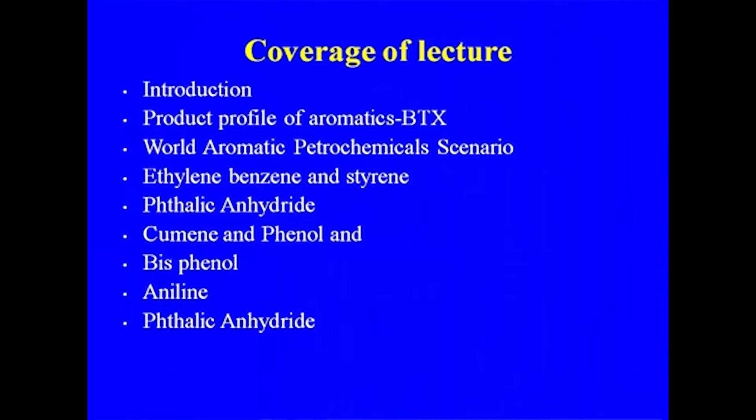As we discussed, ethylene is the king of chemicals, so aromatics is the backbone of the organic chemical industry. This was true even before the coming of the cracker.

There was aromatics production in some form, and one route was through coal, coke oven gas. We already discussed coal chemicals and the different types of aromatics obtained from them. Now we are talking about orthoxylene for phthalic anhydride, but earlier it was the naphthalene route produced from the coke oven plant.

This shows the historical importance of aromatics, but their real growth came only after the advent of catalytic reforming, because the requirement for aromatics is huge.

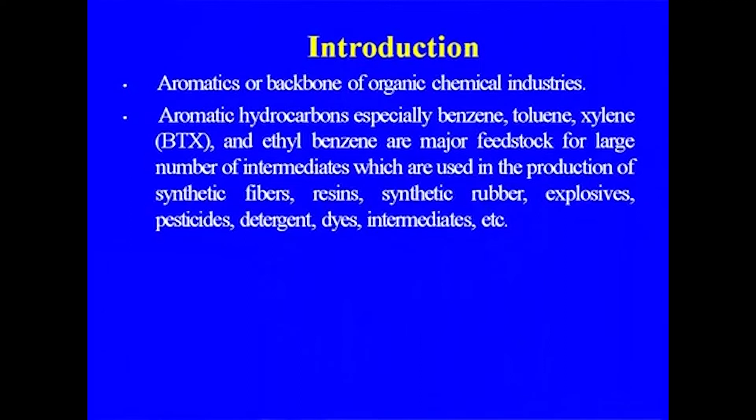If you see the product profile of aromatic hydrocarbons, especially benzene, toluene, xylene (BTX) and ethyl benzene, these are major feedstocks for a large number of intermediates used in the production of synthetic fiber. Take the case of benzene: we produce cyclohexane, and cyclohexane to caprolactam.

Similarly, xylene goes to paraxylene to TPA (purified terephthalic acid), or DMT. We also make various resins, like polystyrene resin, one of the important resins, and synthetic rubber like SBR and others, using huge amounts of aromatics. Explosives like TNT were also made this way.

TNT was a very important explosive during World War I and World War II, playing an important role. For pesticides, benzene hexachloride, called gamexine, was the first pesticide made from benzene.

After that, DDT was used, but it was later banned. For detergents, linear alkyl benzene is used - I already discussed its importance, where we use benzene for the alkylation process. For dyes and intermediates, huge amounts of aniline are used for production of dye intermediates.

These are some of the derivatives of benzene. From benzene to cumene, cumene to phenol and acetone, because during the manufacture of phenol from cumene, we also get acetone as a byproduct.

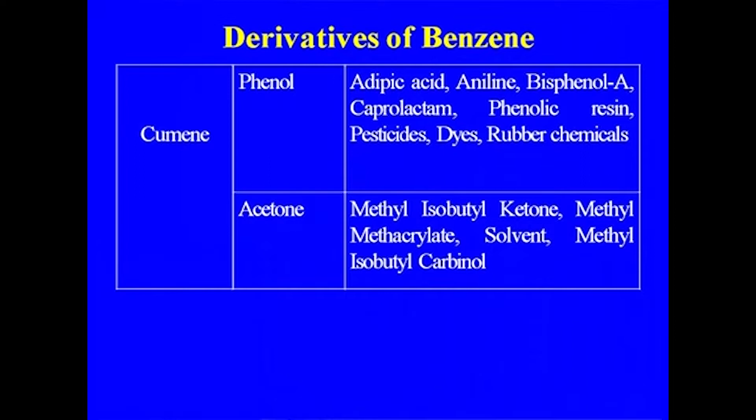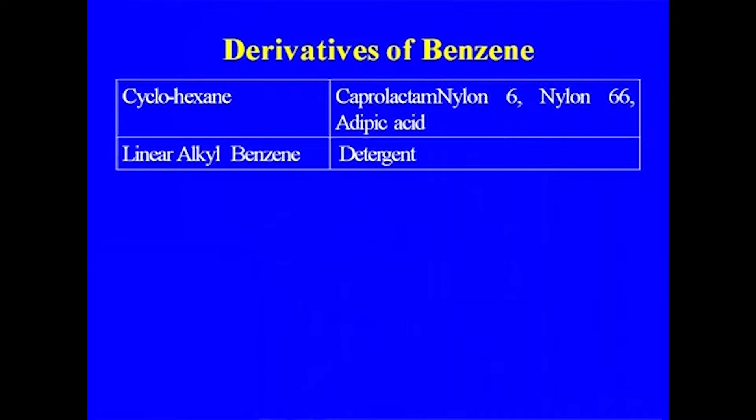Cyclohexane is another derivative of benzene that we make, going into manufacture of caprolactam, nylon 6, nylon 66, adipic acid, and linear alkyl benzene for biodegradable detergent manufacture. With the coming of linear alkyl benzene, there has been a lot of change in the detergent industry due to availability of raw material from the petrochemical route.

Another derivative of benzene is maleic anhydride, which finds wide application as lubricating additives, copolymers, agriculture chemicals, unsaturated polyester resin, and 1,4-butanediol. These are some of the product outlets for maleic anhydride.

Chlorobenzene was the route for the aniline or the nitrobenzene that we are using. So for making that chlorobenzene, chlorination of the benzene, that was the route.

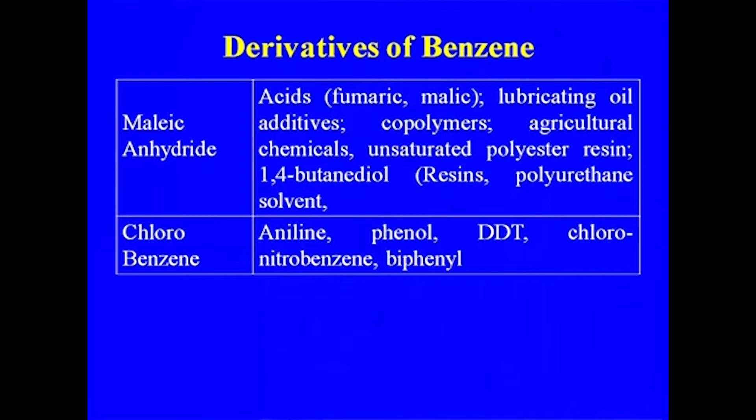So aniline, phenol, DDT, chloronitrobenzene and biphenyl - these are some of the other important chlorobenzene derivatives. As I told you, nitrobenzene is being used for the manufacture of aniline, dyes and intermediates, rubber chemicals, drugs, pharmaceuticals, photographic chemicals, isocyanate, BHC.

That is being used as pesticide. Ethyl benzene, that is one of the very important derivatives of benzene, which is going for the manufacture of styrene.

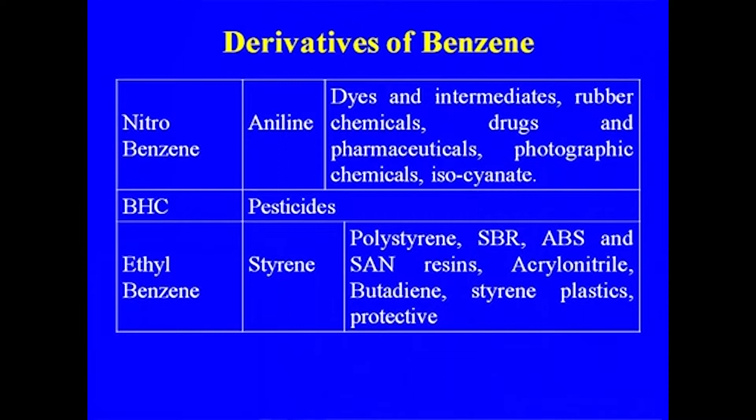And so if you see the styrene, the polystyrene, SBR, ABS - acrylonitrile butadiene styrene polymer resin - and SAN resin, plastics, protective coatings. So these are some of the outlets for the styrene.

You see they are having less usage of toluene normally, but one of the major uses is the manufacture of benzoic acid, where toluene goes to benzoic acid and benzoic acid to caprolactam - that route exists. But mostly what we are doing is going for the disproportionation or dealkylation of toluene for getting more value-added products, benzene and xylene. And this is about benzoic acid.

Then phenol, sodium benzoate - that is one of the very important preservatives that we are making from benzoic acid, that is sodium benzoate. Paracresol, solvents - these are some of the outlets.

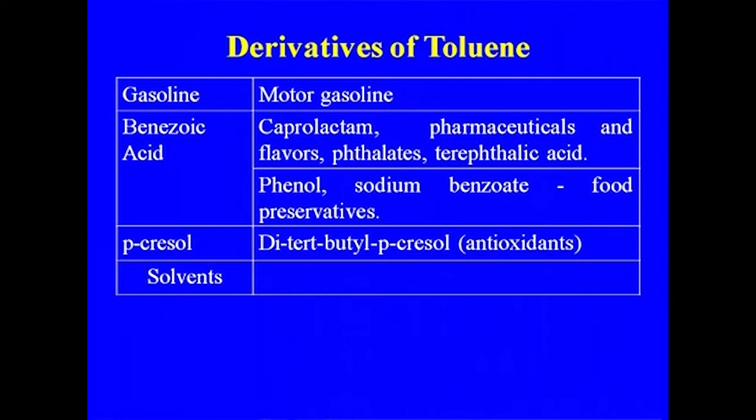Of course the TNT which I told you, that is the very important product, trinitrotoluene. Nitrotoluene, that is going for toluene diisocyanate, which is used for polyurethane, rigid foam, flexible foam, surface coating.

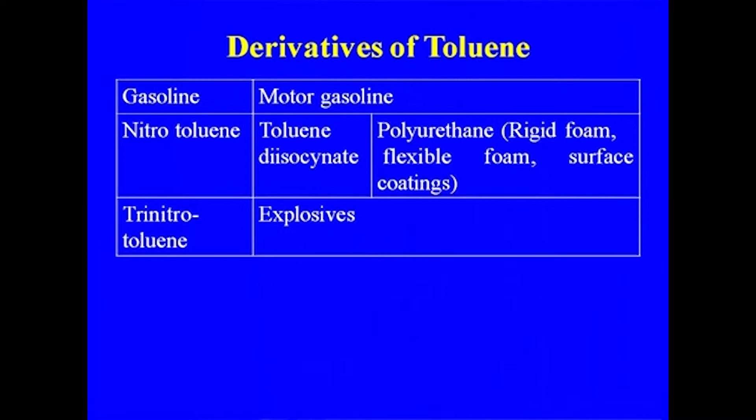Trinitrotoluene, as I told you, is one of the very important explosives, because toluene was available earlier from the coke oven plants also. But with the coming of the catalytic reforming plant, more and more toluene is available.

So the explosive, that may be one of the very important derivatives from toluene which is being used. Although a lot of other explosives have also been developed. So the another important product of this aromatic group is the paraxylene.

Paraxylene, that is used for the manufacture of polyester, meaning first paraxylene to DMT or purified terephthalic acid. So the consumption of paraxylene is estimated to have increased by approximately 4.7% in 2009.

It is expected to average growth of 5.5% per year from 2009 to 2014, and 3.5% per year from 2014 to 2019. This is as per the market analysis of SRI.

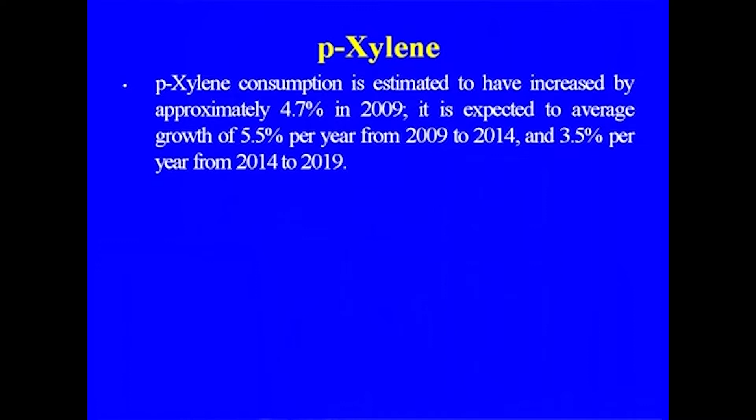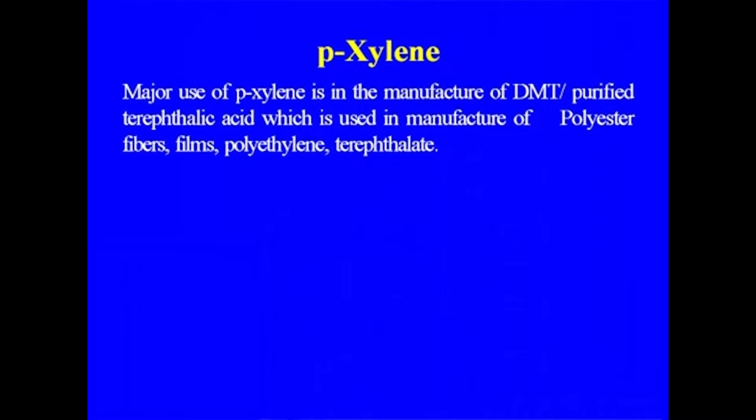So major use of paraxylene, as I discussed earlier, is in the manufacture of DMT, purified terephthalic acid, which is used in the manufacture of polyester fibers, films, and polyethylene terephthalate. So this is one of the major outlets for paraxylene, and this is the integral part of any DMT or terephthalic acid plant where we are making polyester.

Another important product which we are getting from catalytic reforming, when we are doing paraxylene manufacture, is orthoxylene, which is a byproduct of the paraxylene plant. And so now a major portion of orthoxylene goes for the manufacture of phthalic anhydride.

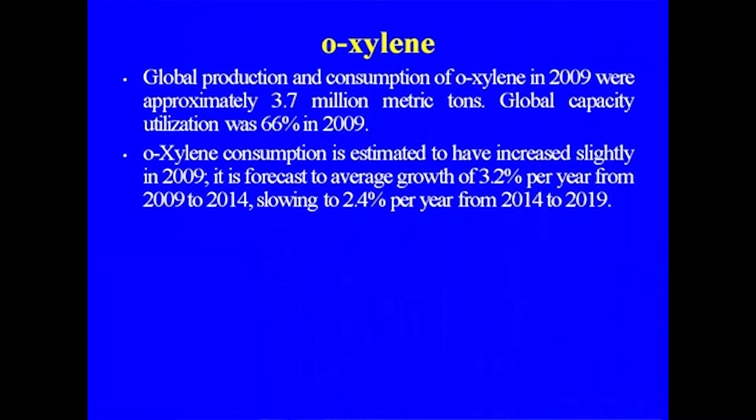So the global production and consumption of orthoxylene in 2009 were approximately 3.7 million tons. Global capacity utilization was 66%. Orthoxylene consumption is estimated to have increased slightly in 2009, and it is forecast to average growth of 3.2% per year from 2009 to 2014.

So this is how the requirement of orthoxylene is increasing, especially for the manufacture of phthalic anhydride. So these are some of the major derivatives of orthoxylene, that is phthalic anhydride, which is being used as plasticizer.

One of the major uses of phthalic anhydride is as plasticizer, polyester resin, alkyd resins, dyes and pigments, herbicides, and some other polyester polyols.

So for metaxylene, one of the major derivatives is isophthalic acid, which is being used for resins, unsaturated polyesters, and then plasticizers and other esters.

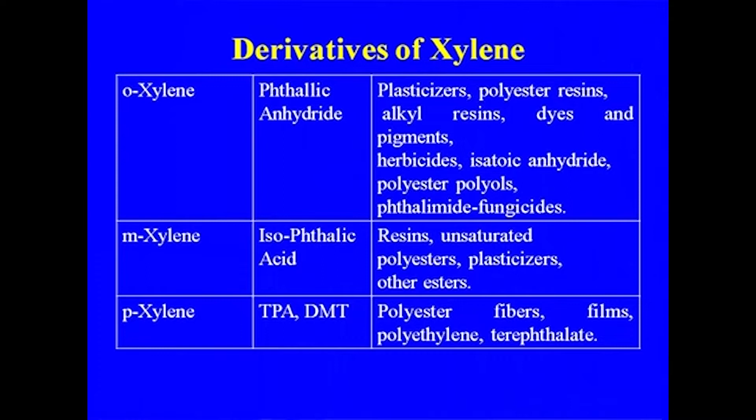Paraxylene already we have discussed. And so this is, as I told you, orthoxylene - plasticizer, polyester resin, alkyd resin, dyes and pigments, herbicide, isatoic anhydride, polyester polyols, and phthalimide, which is used as fungicide.

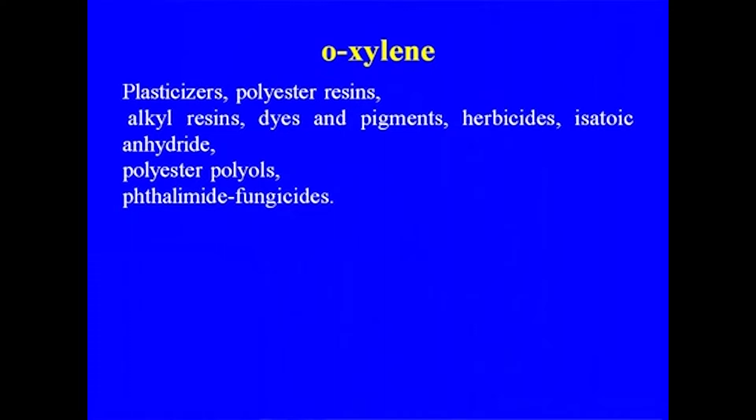Another aromatic group is naphthalene, which was the earlier route for making phthalic anhydride, obtained from the coke oven plant. The major uses of naphthalene, apart from insecticide, naphthol, and mothballs, included being an important source of phthalic anhydride.

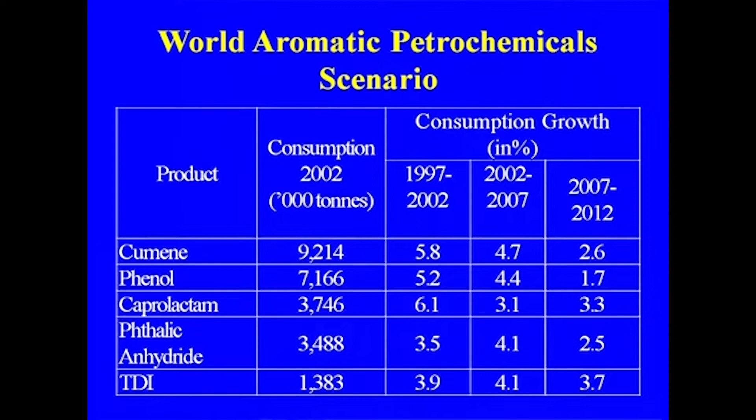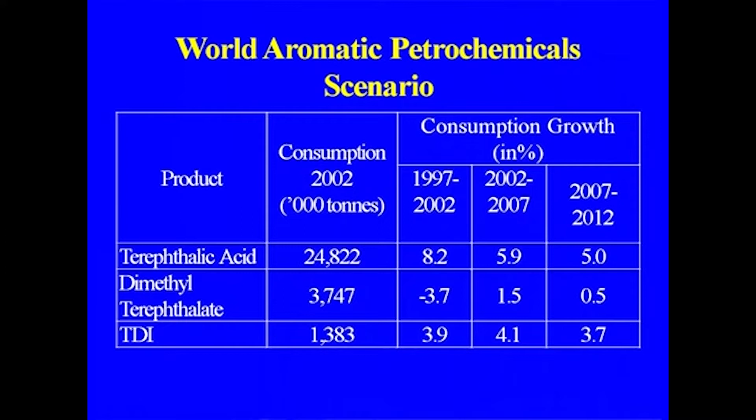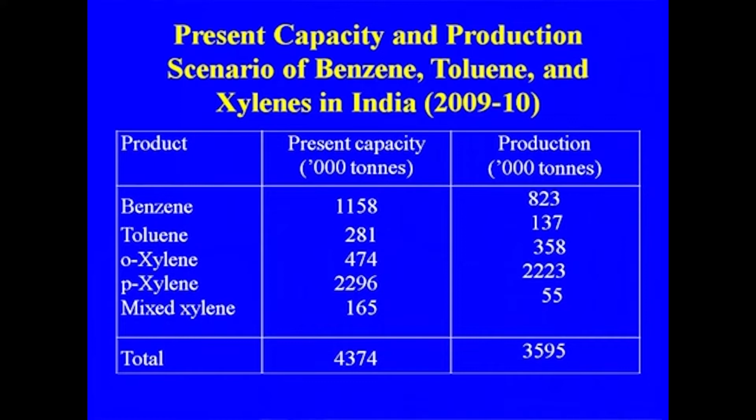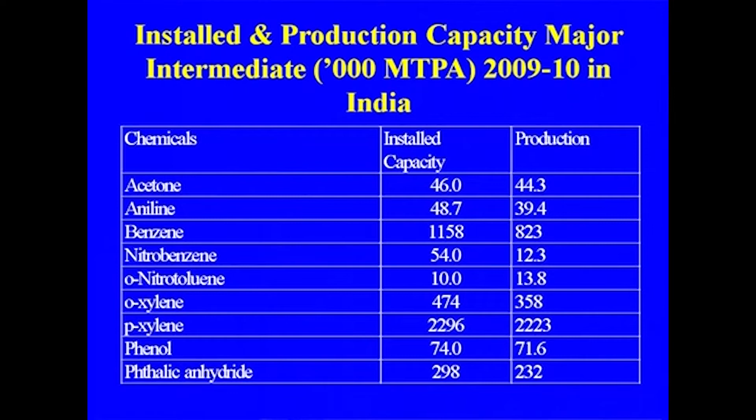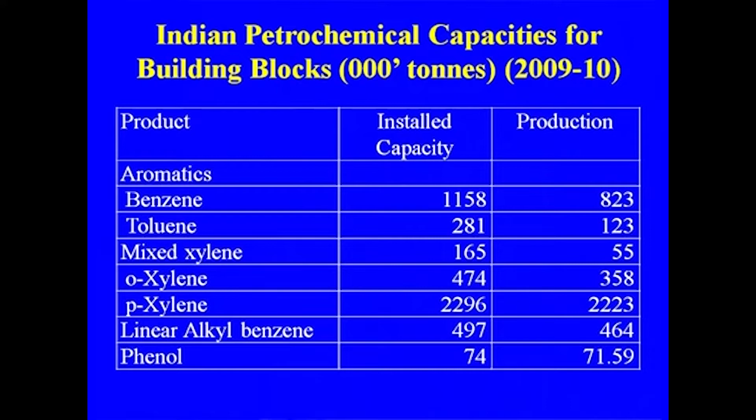Let us now discuss some important derivatives of benzene in more detail. First will be ethyl benzene, because ethyl benzene is used for the manufacture of styrene, and during World War I and II there was huge requirement of styrene butadiene rubber.

Even before the coming of petrochemicals, as with synthetic chemicals, they started making styrene butadiene rubber long back during the 60s. This is the importance of ethyl benzene, an important derivative of benzene which finds application in the manufacture of styrene.

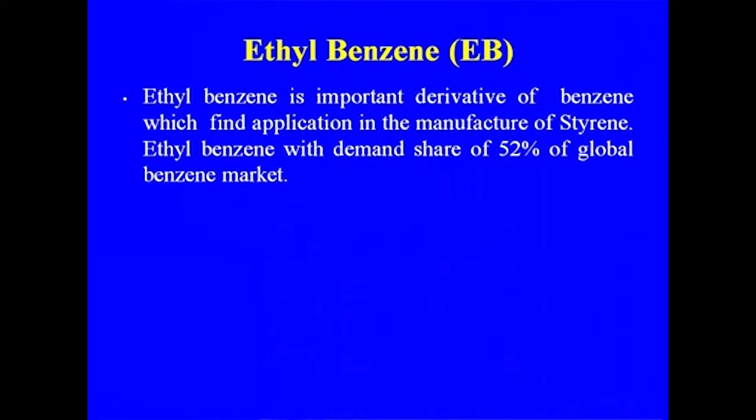Ethyl benzene has a demand share of more than 52% of the global benzene market, where we alkylate benzene with ethylene. Ethylene was coming through the molasses route at that time in the earlier stages when styrene manufacture started.

Global production and consumption of ethyl benzene in 2009 were around 26.3 million tons with global capacity utilization of 75%. Styrene manufacture is the major consumer of ethyl benzene.

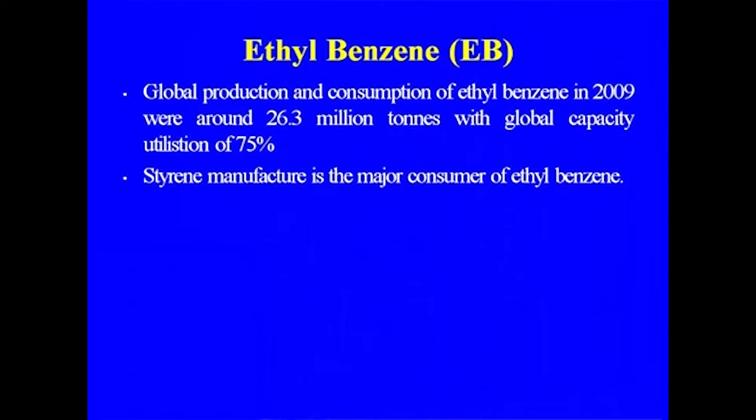Let us discuss now the routes for making ethyl benzene. As the name suggests, ethyl benzene is made by alkylation of benzene and ethylene, and here again the catalyst progression is from H2SO4 to hydrofluoric acid and now to solid acid catalyst.

So, these are some of the developments that have taken place. Ethylene, because we need benzene and ethylene, can be produced from either the molasses route or the naphtha and gas cracker.

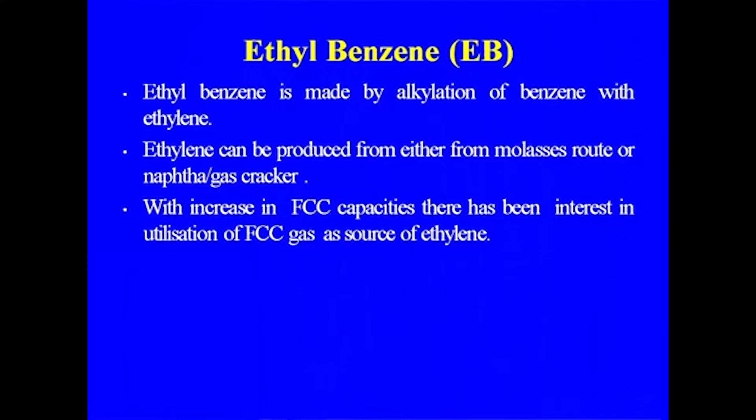But with the increase in FCC, and because more and more we are going to operate in propylene mode, there has been interest in the utilization of FCC gases, where the ethylene may vary from 8 to 12% as a source of ethylene, and directly taking this ethylene for alkylation processes are now available.

The conventional alkylation catalysts, as I told you, are metal chlorides and mineral acids, hydrofluoric acid and H2SO4. Catalysts used for alkylation now are ZSM-5 for vapor phase, and MCM-22 for liquid phase.

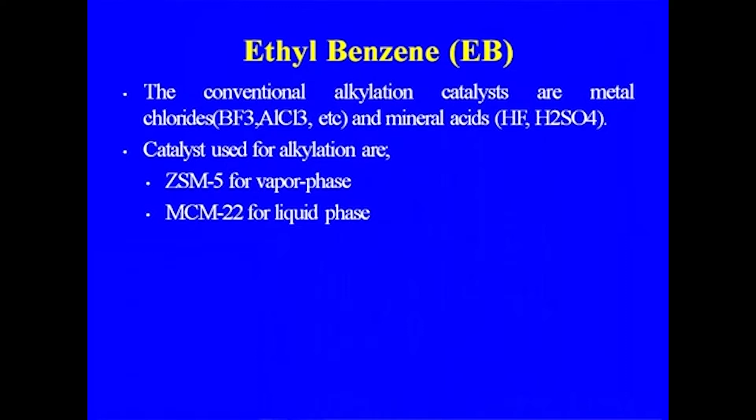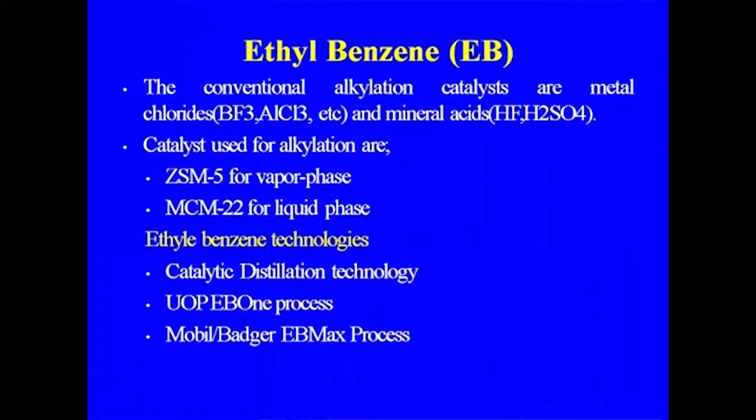The catalyst use - already I discussed ethyl benzene and some of the technologies available for the manufacture of ethyl benzene: catalytic distillation, then the UOP EBOne process, and Mobil-Badger EB-Max process. These are the three major process licensors who are supplying the process for ethyl benzene technology.

Now let us discuss the first process, the catalytic distillation technology, because this is one of the major developments that has taken place. The process consists of alkylation of benzene with ethylene using a proprietary zeolite alkylation catalyst in a fixed bed catalytic distillation technology, where both reaction and slight separation also take place. This process is capable of handling a wide range of ethylene composition, ranging from 10 to 100%, because in case of dilute streams of ethylene, that can also be used in this process.

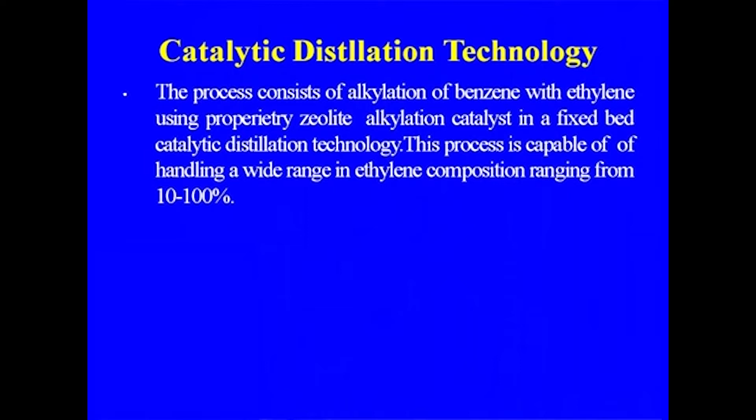So the process steps involved in the catalytic distillation technology: the first major unit is the catalytic distillation stripper column, where alkylation and distillation take place simultaneously, with final alkylation of the unreacted benzene and ethylene in the finishing reactor, where the remaining benzene and ethylene alkylation is completed.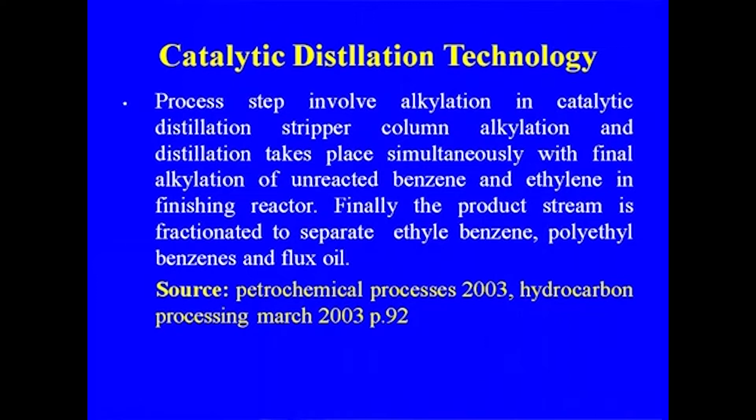Finally, the product stream is fractionated to separate ethyl benzene and the polyethyl benzene, which is also formed during the process, and which is recycled to the transalkylation section, and the flux oil. So these are some of the byproducts: polyethyl benzene and flux oil. Polyethyl benzene is again converted and recycled, but flux oil is the waste we are getting from the ethyl benzene plant.

Another process is the Lummus UOP EBOne process. The process consists of liquid phase alkylation of benzene with ethylene using a proprietary zeolite catalyst in a fixed bed liquid phase reactor - this is the process by Lummus and UOP. Unreacted ethylene and benzene vapor are condensed and fed to the finishing reactor, where the remaining alkylation is completed in the presence of the catalyst.

So here also two reactors are there, and the finishing reactor completes the reaction. The product stream goes to the fractionating column, where ethyl benzene is separated from the higher ethylated benzene and the heavy ends.

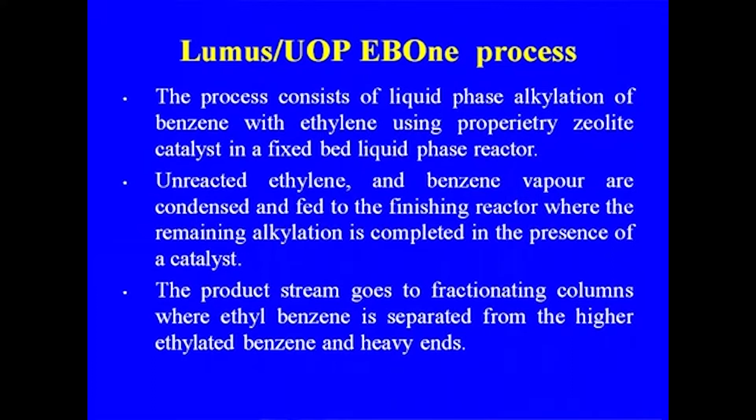The process steps involved are, as I told you, the benzene and ethylene, followed by separation of ethyl benzene and polyethyl benzene, which here also is the byproduct and is recycled back to the transalkylator reactor. This is the finishing stage reactor to produce additional ethyl benzene.

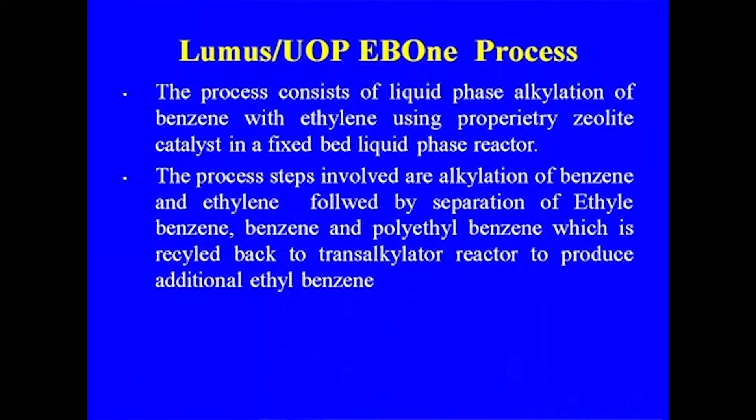Another process is the liquid phase alkylation of benzene with ethylene using MCM-22 catalyst. In this process, alkylation of ethylene takes place in a liquid-filled alkylator reactor containing multiple fixed beds of Mobil MCM-22 catalyst. During this, ethyl benzene and small quantities of polyethyl benzenes are formed.

These are converted to ethyl benzene using a transalkylation catalyst. So this is the reaction which is taking place here, the alkylation reaction.

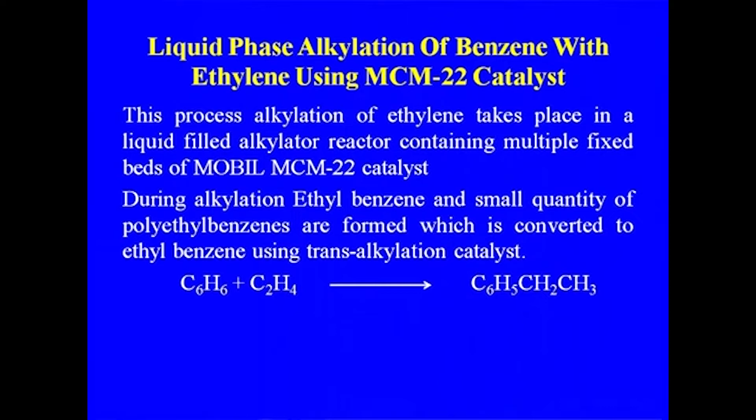Now this was the process for making - because any styrene plant is a combination of ethyl benzene production and then styrene manufacture. Styrene is a monomer used for the production of polymers, resins and rubbers.

The biggest consumer of styrene monomer is polystyrene. Other major derivatives are expanded polystyrene, styrene butadiene latex, styrene butadiene rubber, styrene block copolymer, and combinations with acrylonitrile like ABS, MBS, or SBS.

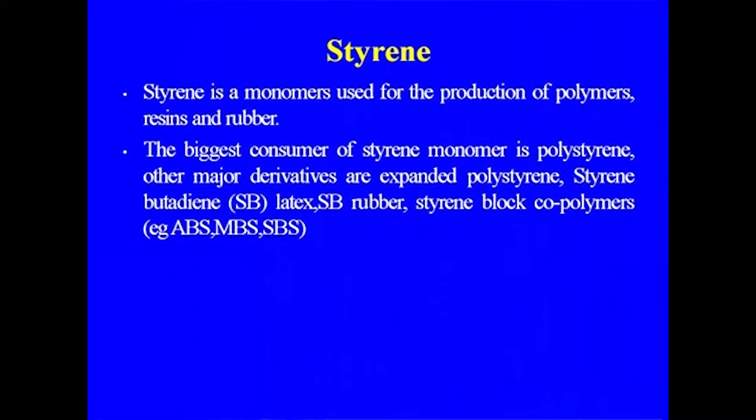So styrene - global production and consumption of styrene was approximately 23 million tons, with a global capacity utilization of 77%. The largest end use of styrene is for the production of polystyrene, accounting for almost 60% of total styrene consumption.

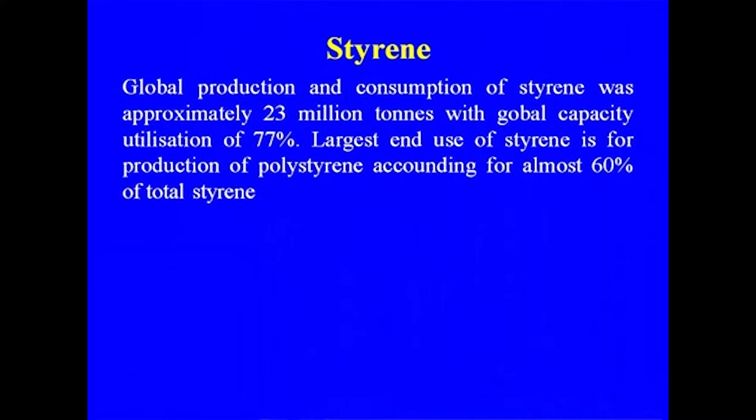So the process of making styrene: styrene is made by the catalytic dehydrogenation of ethyl benzene - this is the process that we are using. A styrene plant consists of two major units: production of ethylene either from the molasses route or by naphtha/natural gas cracking, production of ethyl benzene, and then dehydrogenation of ethyl benzene to styrene.

This is the Lummus UOP EB One process. In this process, first benzene is alkylated with ethylene, followed by dehydrogenation of the ethyl benzene to form styrene.

The polyethyl benzene formed during alkylation is fed to another reactor, where the transalkylation reaction takes place. These are some of the reactions taking place in styrene manufacture.

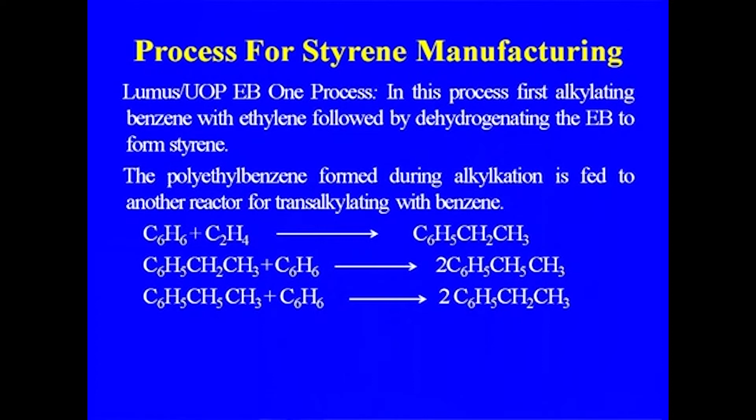Finally, ethyl benzene, along with recycled ethyl benzene from the manufacturing process, is dehydrogenated to styrene in the presence of steam at a temperature of 550 to 568 degrees centigrade under vacuum in a multi-stage reactor. This is the reaction taking place, but toluene is also formed in the process, which is recovered.

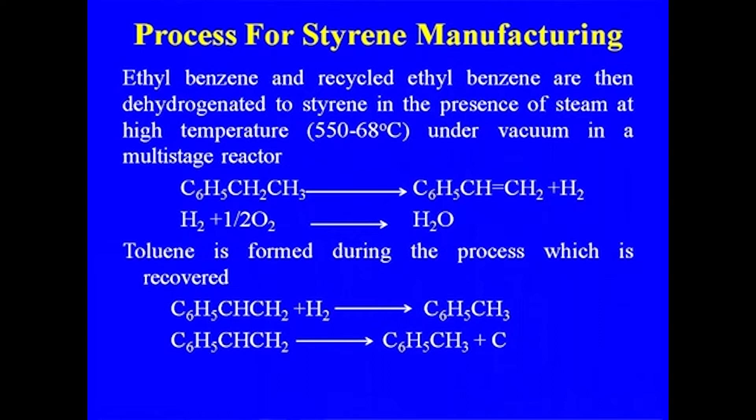Another process technology for manufacture of styrene is the GT styrene process. Styrene can also be directly recovered from raw pyrolysis gasoline derived from the cracking of naphtha and gas oils using the GT styrene process.

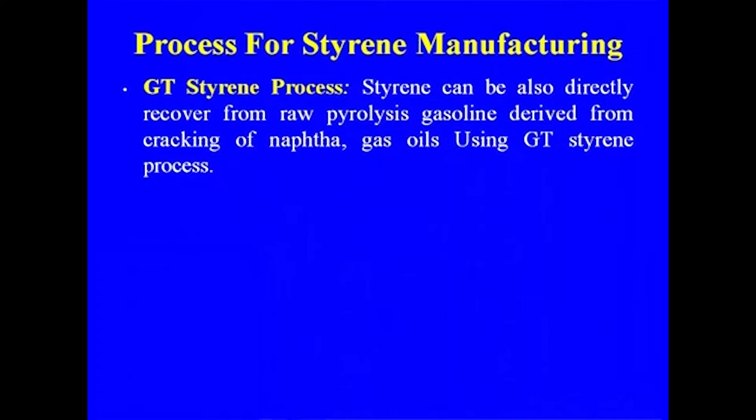As I told you, during the manufacture of aromatics, along with the other C8 compounds like paraxylene and orthoxylene, ethyl benzene is also present. That ethyl benzene is separated and can be used for making styrene.

As I discussed, the ethylene available from FCC gases can also be used. So here, ethyl benzene can be directly separated from the pyrolysis gasoline.

This is another very new development in styrene technology, the innovative SNOW technology. The SNOW technology has been jointly developed by Snamprogetti and Dow.

It represents a technological and economical breakthrough in styrene production and uses benzene and ethane as raw material, which is dehydrogenated in the same reactor for ethyl benzene, because dehydrogenation of ethane to ethylene takes place there and that is used for ethyl benzene manufacture.

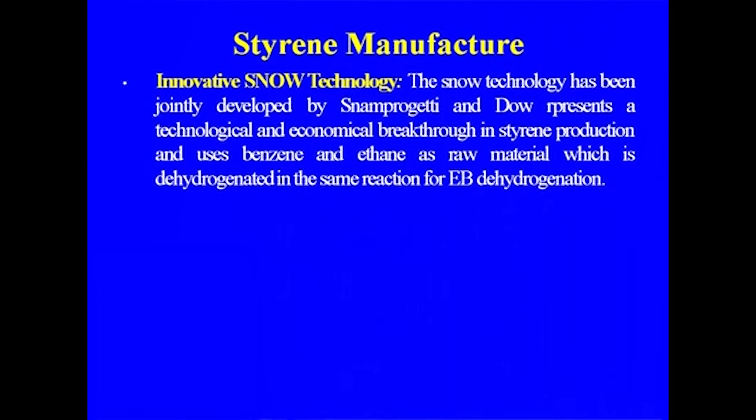Lummus UOP classic styrene process. In this process, ethyl benzene is catalytically dehydrogenated in vapor phase to styrene in the presence of steam. The vapor phase reaction is carried out at high temperature under vacuum. High purity styrene is separated by fractionation.

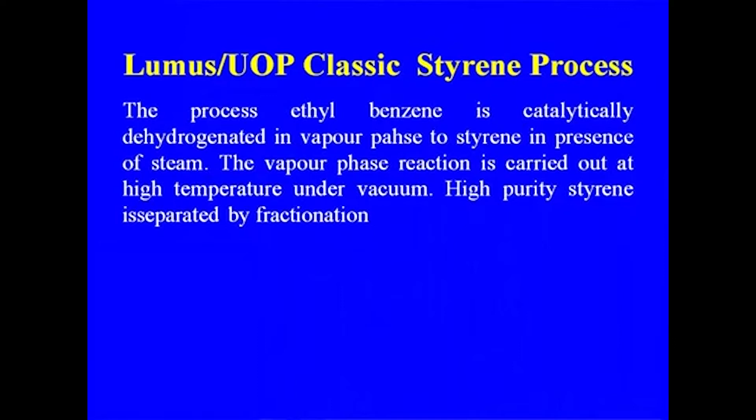Now, this was about ethyl benzene and styrene, which is one of the very important derivatives, because a huge amount of styrene goes for making polystyrene.

Another important product in case of benzene is cumene, used to make phenol. Cumene is made by alkylating benzene with propylene, and this was the process that replaced other processes, because propylene is available from the cracker plant and benzene is available from the aromatic plant.

So the raw material is much more economical than the conventional raw material used for making phenol, which was via the chlorobenzene route or some other routes. Cumene is made by alkylating benzene with propylene using zeolite catalyst.

Following are the three major processes available: catalytic distillation technology, liquid phase Q-max process, and cumene by the Mobil-Badger process.

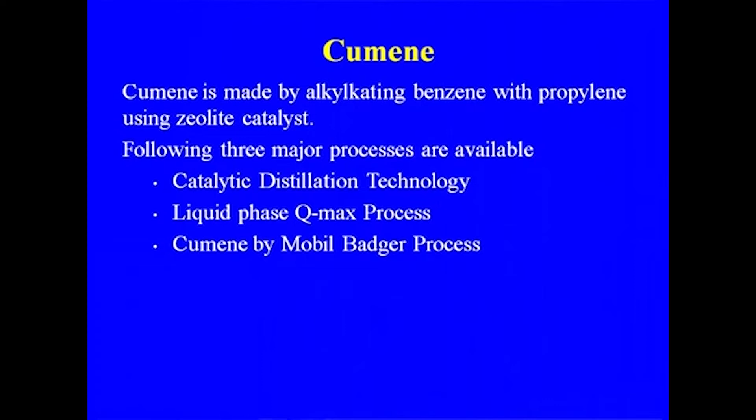These are some of the reactions taking place between benzene and propylene to get cumene. During cumene manufacture, we also get some DIPB, which reacts with benzene to form more cumene, along with other side reactions, but finally we get cumene.

In this process, propylene and benzene, along with fresh benzene, go to a series of reactors: the alkylation reactor, the transalkylation reactor, the depropanizer, and then the benzene column, cumene column, and polyisopropyl benzene column. Finally, the cumene is separated and goes for making phenol.

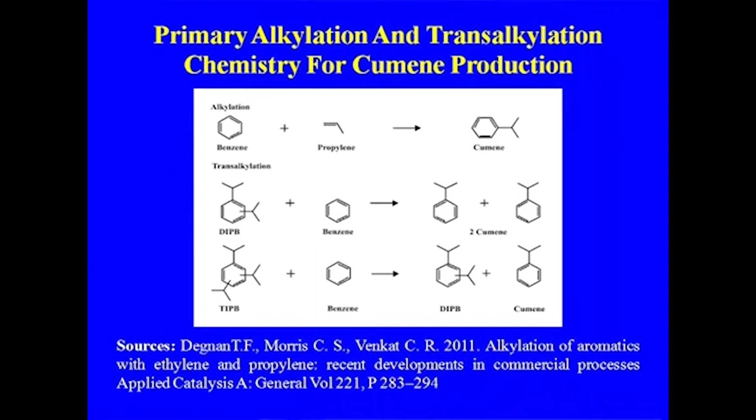So this was the importance of the cumene, and now the phenol process, making of the phenol, it is all through the cumene process. So while making cumene to phenol, we are getting acetone, one of the very important products, as a byproduct.

According to SRI Consulting Report 2010, global production and consumption of phenol were both around 8.0 million tons, with global capacity utilization of 77%. Phenol consumption is expected to average growth of 5.1% per year from 2009 to 2014, and around 2.5% from 2014 to 2019.

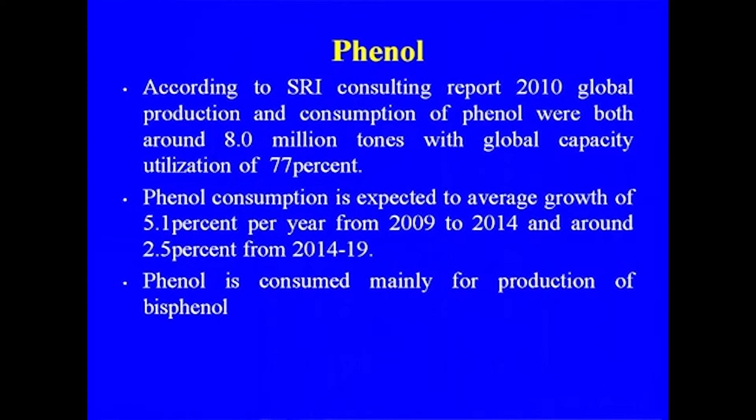Phenol is consumed mainly for production purposes; it has other uses too. One of the major outlets is the manufacture of bisphenol, which is used for making polycarbonate.

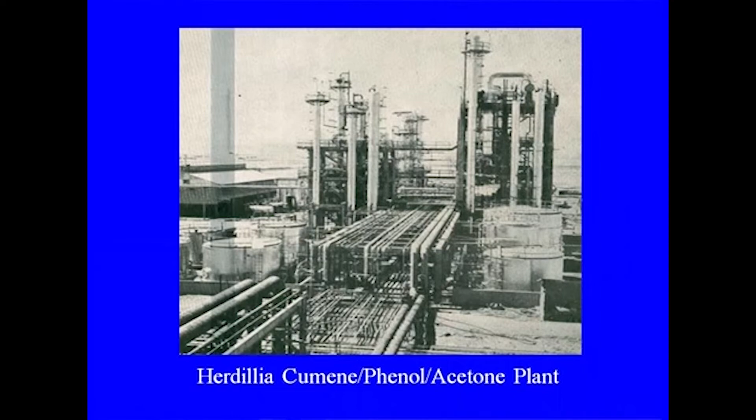Phenol from cumene, as I told you, has now replaced all other phenol processes with the cumene process. Phenol from cumene is a two-step process, with the first step being the production of cumene hydroperoxide, and the second step being the decomposition of cumene hydroperoxide to phenol and acetone, which is the byproduct during the manufacture of phenol. The temperature is around 180 to 200 degrees centigrade, with metal catalysts such as aluminum chloride, bentonites, silica aluminates.

So the various other routes for phenol, as I told you, include the benzoic acid route, the chlorobenzene route, or the benzene sulfonation route. But now most phenol is made by the cumene process, which is most attractive because of the availability of benzene from the catalytic reforming process and propylene from the cracker plant or from the dehydrogenation of propane.

These other routes exist: from toluene to benzoic acid, then benzoic acid to phenol, or from chlorobenzene. But in the chlorobenzene route, you take benzene that has to be chlorinated, so chlorine is involved. Because of these reasons, the more preferred route for making phenol is the cumene route. Another route is benzene sulfonation, where handling of sulfuric acid is involved. Above all routes, the cumene route is the most economical and accounts for the major phenol capacity.

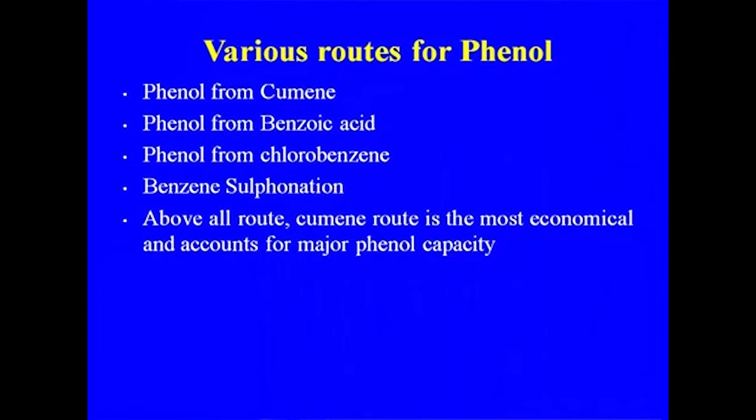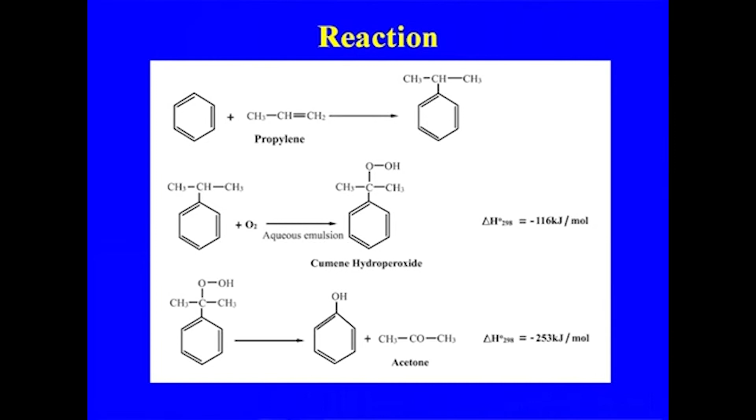This is the reaction taking place in phenol manufacture: benzene and propylene are reacted, giving cumene, and from the cumene hydroperoxide you finally get phenol and acetone as a byproduct. This is the oxidation in an aqueous emulsion where cumene hydroperoxide is formed, and from the cumene hydroperoxide, phenol plus acetone is obtained. This is the process used for the manufacture of phenol.

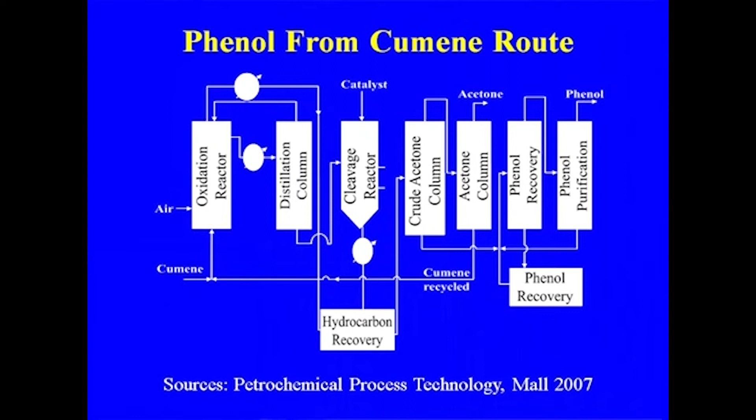This is the phenol-from-cumene process. The cumene goes to the oxidation tower, then the distillation tower, then the cleavage reactor where catalyst is added, giving crude acetone. This goes to the acetone column where separation of acetone takes place, and from the crude acetone bottom product it goes to the phenol purification section where phenol is finally obtained. At the bottom, this joins the phenol recovery section, then the final distillation separates the phenol.

So in any phenol manufacturing plant, you will have the cumene manufacturing part, then the cumene-to-phenol recovery part, meaning finally you get phenol here, and acetone is obtained as a byproduct of the cumene process.

Now let us discuss another very important product of benzene, that is aniline, which is used in huge amounts as a dye intermediate. Aniline is used as a raw material for manufacturing a large number of chemicals like methylene diphenyl di-isocyanate (MDI), rubber processing chemicals like antioxidants and stabilizers, agricultural chemicals including aniline-based fungicides, insecticides, animal repellents, and different dyes and pigments speciality fibers, as well as in pharmaceuticals and petrochemicals.

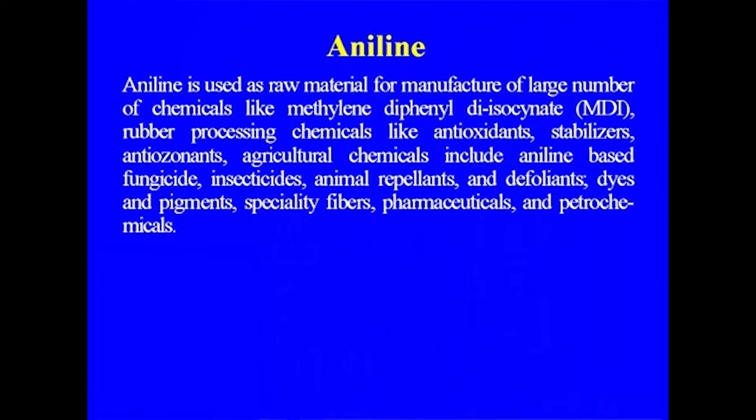As I told you, large tonnages of aniline derivatives are used in a large variety of dyes, because a wide variety of dyes have been developed depending upon the type of textile. So aniline has been providing the basic intermediate for making a large number of dyes. A major portion of aniline is also used in the manufacture of rigid polyurethane.

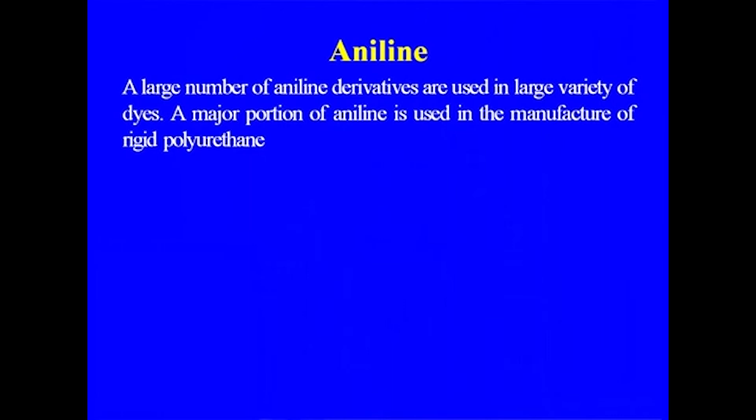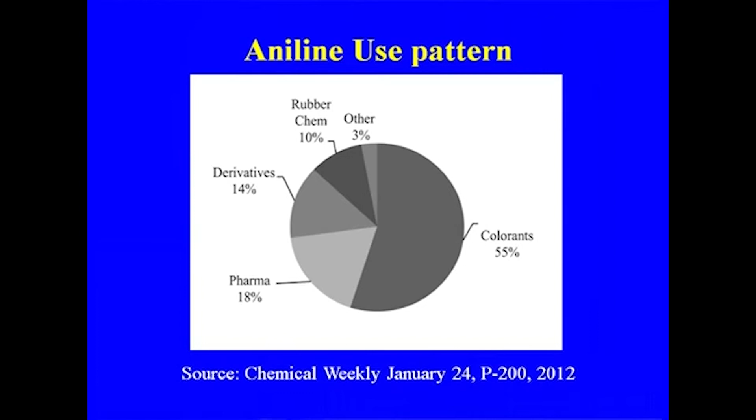So the major portion of aniline goes as colorants and in the manufacture of dyes. The rest goes into pharmaceuticals and other derivatives, rubber chemicals, but the major portion goes as colorant. These are the major uses of aniline.

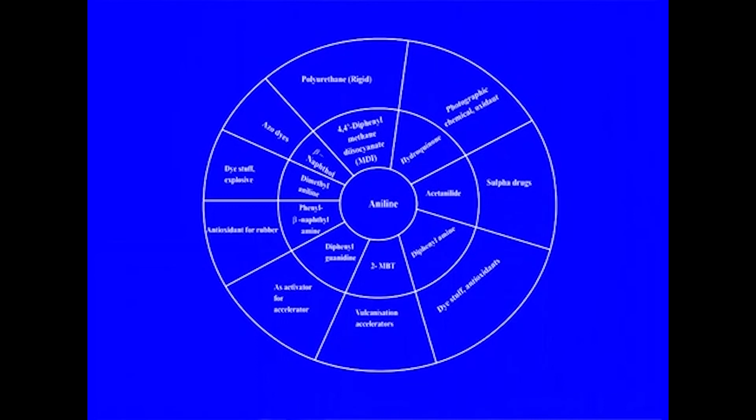A large number of products come from aniline - 2-MBT is used for vulcanizing and as an activator for the accelerator, and diphenylguanidine. These are some of the major outlets of aniline. Even before the coming of the aromatic plant, the route for making benzene aniline was through the coke plant, getting aromatics from the coke plant.

GNFC is one of the large integrated petrochemical complexes where they also make fertilizer, and at the same time many petrochemicals. So now they have two divisions - one is the fertilizer division and the other is the chemical division.

Nitrobenzene is the important feedstock for aniline, and a major portion of nitrobenzene is used directly or indirectly as aniline in dye manufacture.

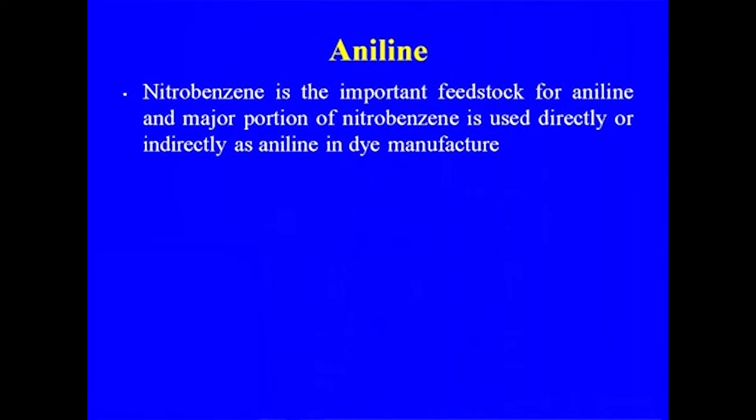This is the reaction in the manufacture of aniline. It is produced by ammonolysis of chlorobenzene at 200 to 220 degrees centigrade, or by vapor phase reduction of nitrobenzene. So this is from the nitrobenzene route, and this is from the chlorobenzene route. Both routes were earlier used, and are still being used, for making aniline - either through the chlorobenzene route or the nitrobenzene route.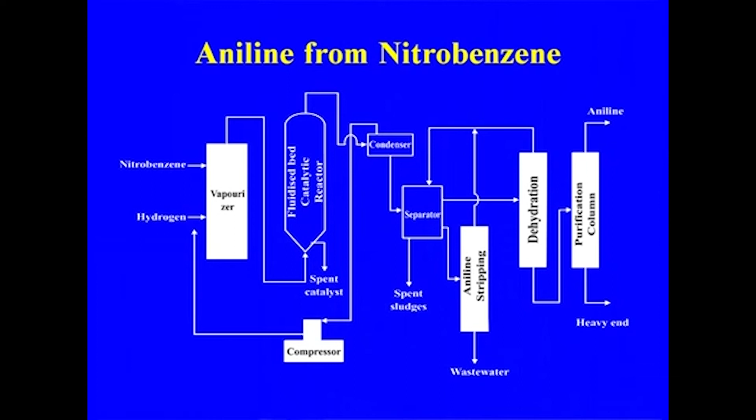Now let us discuss bisphenol, one of the important derivatives I told you about earlier, because this is the major raw material for polycarbonate and a major consumer of phenol - phenol and phosgene are used here for making bisphenol.

Bisphenol is used for the manufacture of polycarbonate plastic and epoxy resin. It is also used as a flame retardant, in unsaturated polyester resin, polyacrylate, polyetherimide, and polysulfone resins.

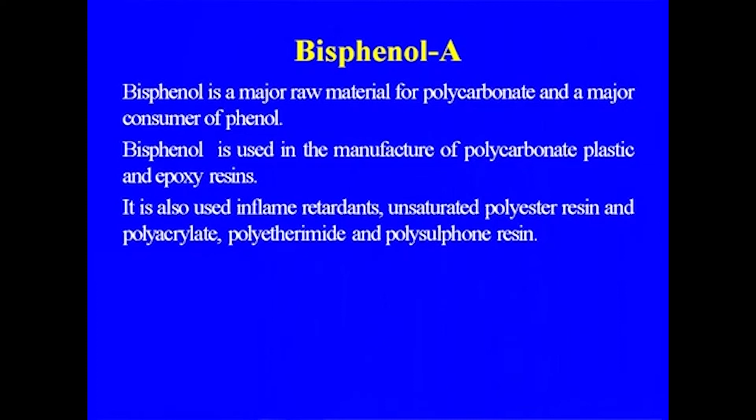One of the major outlets for bisphenol is polycarbonate, optical glasses, and many others, because it has very high strength, so it is used in polycarbonate. Even CDs and other electronics industry applications - there are a lot of uses of polycarbonate.

The technology involves condensation of phenol with carbonyl compounds, condensation of phenol with alkenyl phenol, condensation of phenol with ethylene and acetylenes, and condensation of phenol with alkyl benzene.

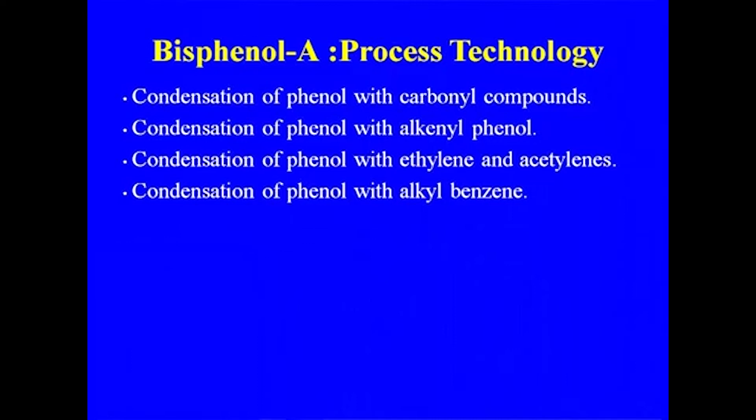These are some of the routes available, but the major process which we are using for the making of bisphenol is either the ABB Lummus Global Sinopec technology, or the Chiyoda Corporation CT-BISA process.

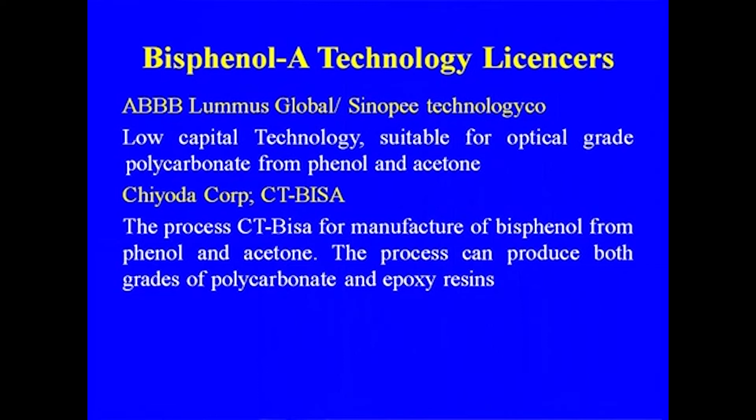This is low capital technology suitable for optical grade polycarbonate from phenol and acetone, because the huge application of polycarbonate is for making optical glasses also. Another process for the manufacture of bisphenol from phenol and acetone can produce both grades of polycarbonate and epoxy resins. Let us discuss the process technology for bisphenol.

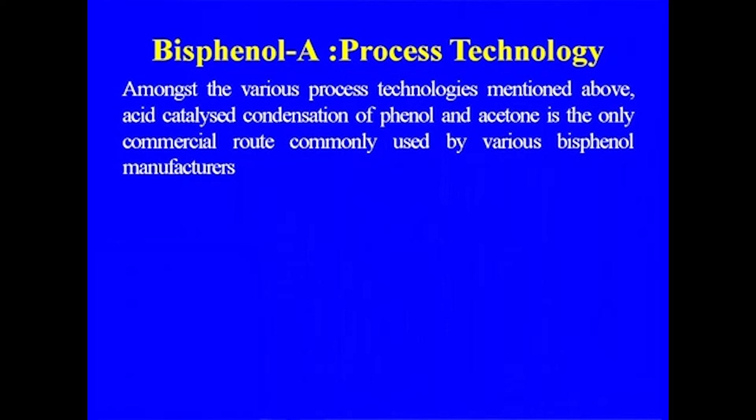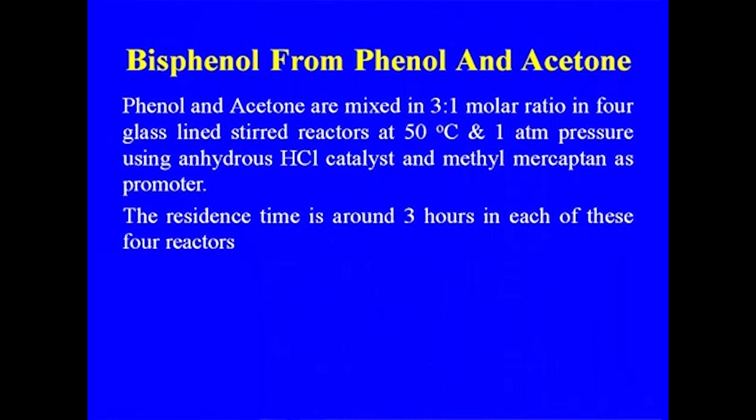Amongst the various process technologies mentioned, acid catalyzed condensation of phenol and acetone is the only commercial route commonly used for bisphenol manufacture. Phenol and acetone are mixed in a 3:1 molar ratio in 4 glass-lined stirred reactors at 50 degrees centigrade and 1 atmosphere pressure, using anhydrous HCl catalyst and methyl mercaptan as promoter. The residence time is around 3 hours in each of these 4 reactors. This is the reaction taking place during the manufacture of bisphenol.

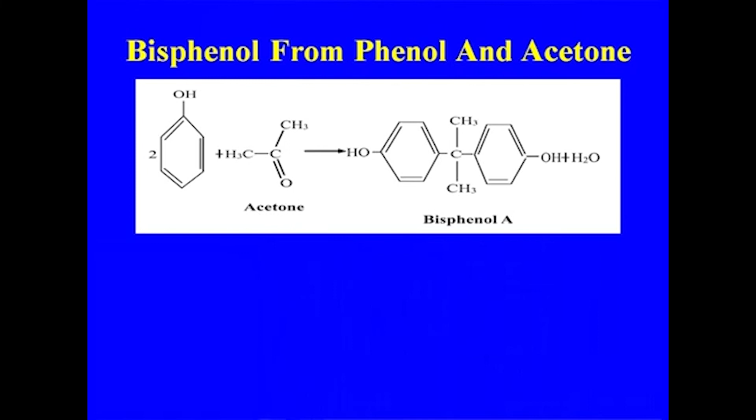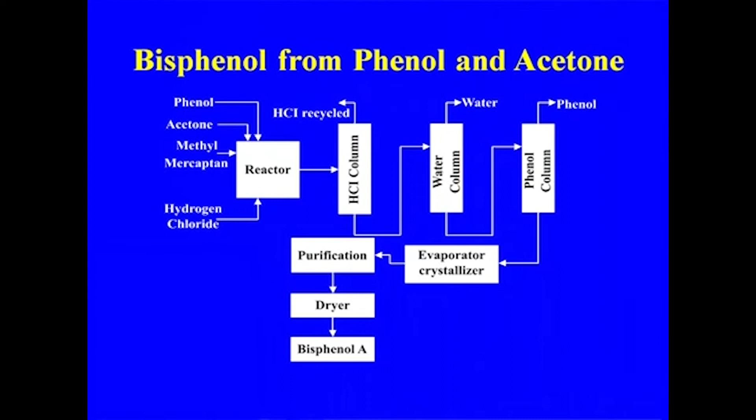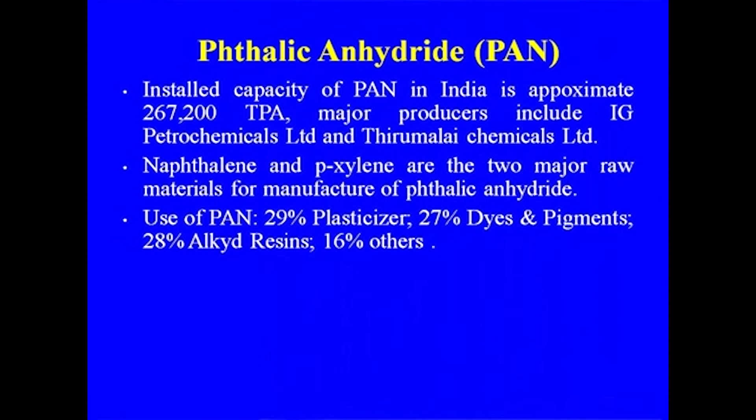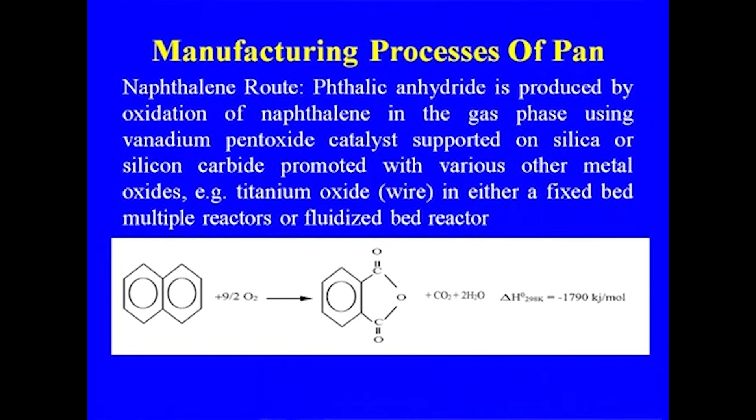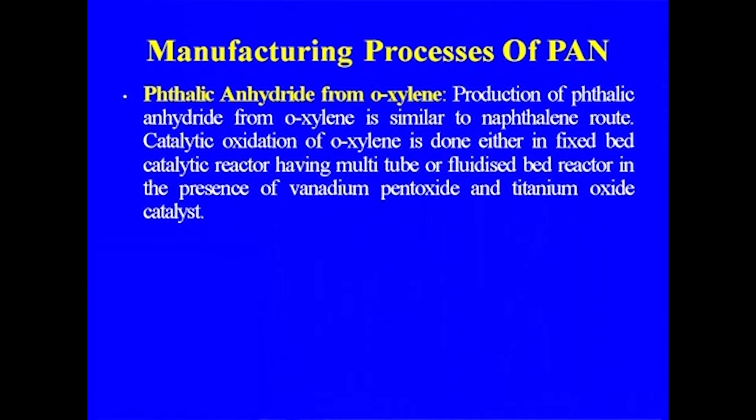The next, module 8 will discuss the polymer industry, because polymer means plastic, elastomer, or synthetic fiber, in which these aromatics also find wide application as feedstock. The next 8 lectures in module 8 will discuss polyolefins, PVC, polystyrene manufacture, and synthetic fiber manufacture including caprolactam and nylon 66, terephthalic acid, and also viscose rayon and acetate rayon, which are important segments of the synthetic fiber industry. So the next 8 lectures will be on polymer, elastomer, and synthetic fiber in module 8, and after that the last module will be on pesticides and dyes and intermediates.